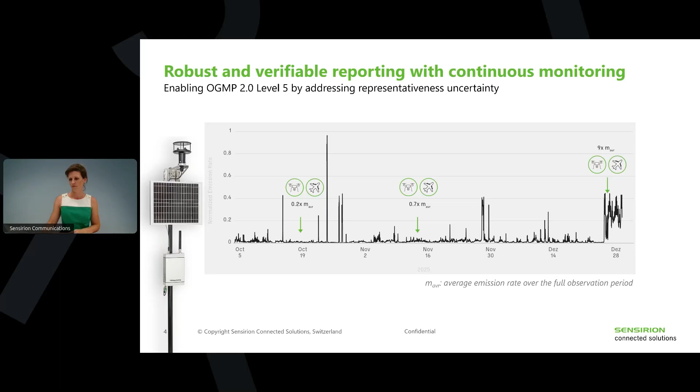We foresee, a bit high level spoken, a 5-step pathway to measurement informed reporting of site level emission rates. And it truly all starts with getting the deployment right. We call it the coverage-based deployment. And what do we mean with that? You'll see in a second, very high level spoken.

It means we take the geometry of the site, but also the atmospheric simulations into account to determine sensor placement. So meaning numbers and locations of these sensors. So where are they installed best to give you the best performing outcome?

Second step, and it goes a bit hand in hand with the first, is we as Sensirion, we can offer you 3 solutions and you can deploy them staggered or multi-layered. So you can deploy all 3 of them or just 2 or just 1. It really depends on your site's complexity and the layout, your emission profile, many things, but this is a flexibility we can provide to you. And that obviously does go hand in hand with the siting. So step 1, meaning where do we place a camera versus a fence line sensor or a close proximity sensor?

Then the third step is actually generating the data, and that in a continuous fashion. In this case here, the continuous quantification is obviously the most important parameter or output.

Where quantification of site level emission rates under the hood of OGMP level 5 reporting would already contain a certain gap filling approach or methodology, as well as an uncertainty estimate, which both, I think all of you who have ever gone through the effort of reconciling multiple data sets, making sure you get an idea of what to report to OGMP, like those estimations are very important, or the handling of uncertainties is very important.

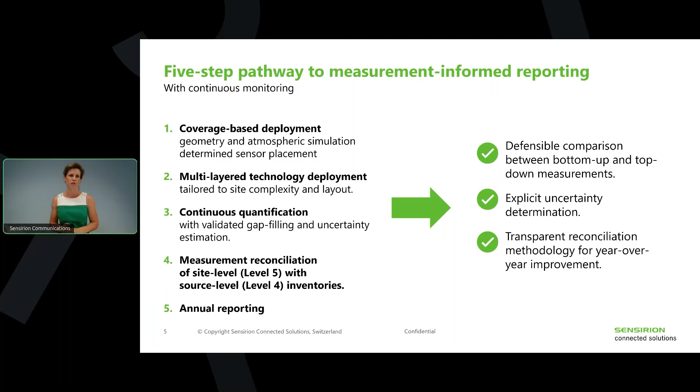Step 1, the coverage-based deployment. What does that mean? And it's really not black magic, but nevertheless, there was quite some effort we put into it. It starts with, well, you need to first understand what is the equipment that needs to be covered, and that we do together with the operator.

So our customer success team typically would take a look at your site and would start discussing, well, what kind of emission sources do you have on site? Where are they located? How high are they? What is the typical emission profile you would expect from either that specific equipment or the site as a whole? And then we start adding sensors. Again, using our portfolio, can be cameras, can be fence line sensors, as in the picture you see on the right, can be close proximity.

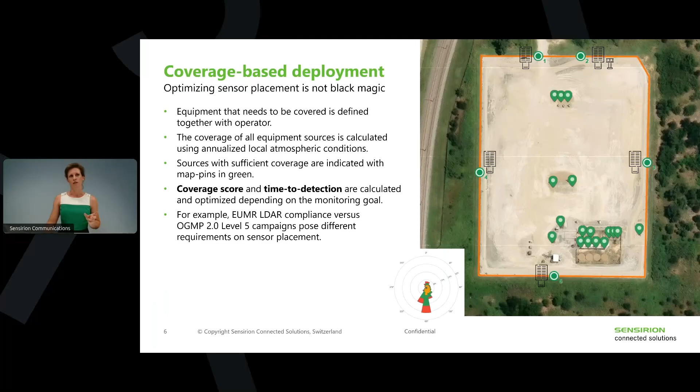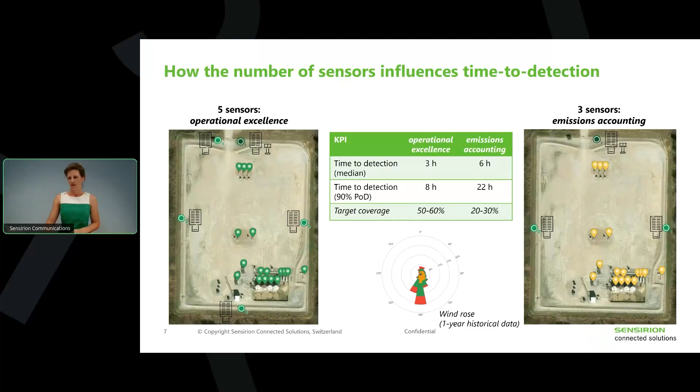The more complex the site becomes, the more likely it is we will recommend you to also deploy a CUVA camera. If you have indoor equipment, you may want to add a close proximity sensor because it's certified for hazardous zone usage, etc. All right. And then the third step would be, and there, let me go back a bit to what my colleague Felix has shown you a couple of weeks ago, but I will summarize that fairly quickly.

If you want to come up with an accurate emissions inventory, there are 3 key requirements on that technology. First, you need to have a high fidelity emissions estimate with a very low bias. If you would continuously over or underestimate, it clearly would falsify the reported numbers. You need to have sufficient data to reduce the statistical error. That's pretty much going back to the first slide I showed you: continuous monitoring versus periodic. And then last, you need sufficient observed measurements, so the periods of time where the deployed technology can monitor the site and come up with quantified values, in order to extrapolate to the rest of the year across your asset base, etc.

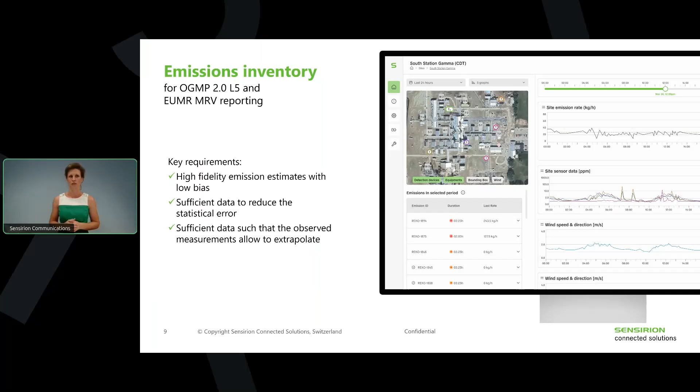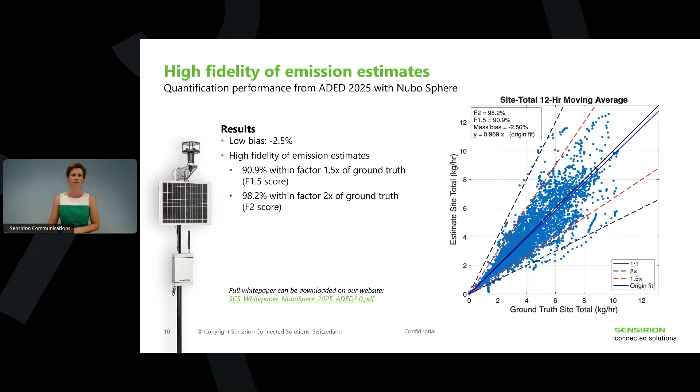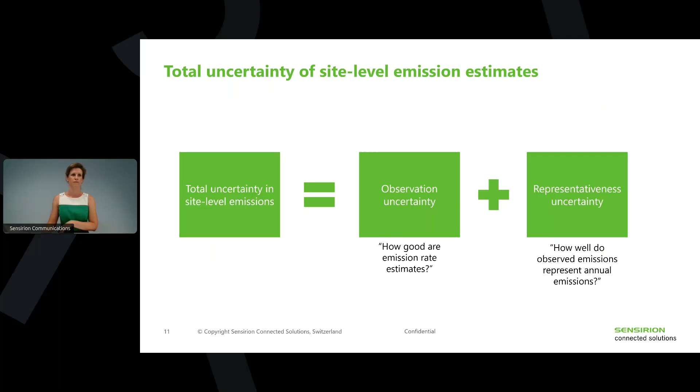The total uncertainty of site level emission estimates, if I were to make it super easy, is made up of 2 things. The observation uncertainty, so that's pretty much how good are the emission rate estimates you just saw on the previous slide where Nubosphere stands today, and the representativeness uncertainty. That means how well do the observed emissions represent the annual emissions. And the latter, that is what can be addressed with continuous monitoring the most. That's why, again, as a reminder here, that plot.

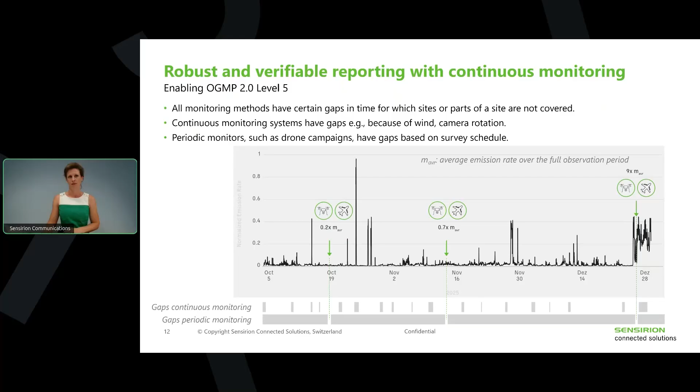And there has been quite some research done in the past couple of years too. So this is not done by Sensirion, but by universities such as the School of Mines, who is very prominent in publishing results about how this gap filling procedure then also can be applied in real life to not only keep it as a theoretical construct.

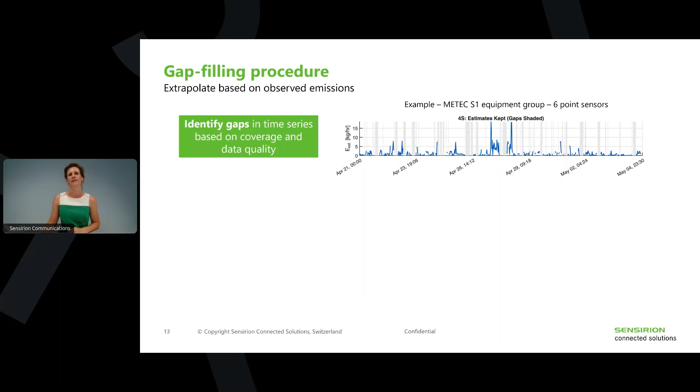So how does gap filling work? Again, very simply explained here. First, as on my previous slide shown, you have to identify the gaps. So you have to develop an understanding based on coverage and data quality too. That's important. We also throw data away that we do not trust. So you have to identify these gaps and you have to treat them. And how do you treat them? Well, you fill them, you backfill them with the historic mean of that site. It's that easy, one could say. And then you build your annual site total of the combination of the observed and the gap-filled time periods.

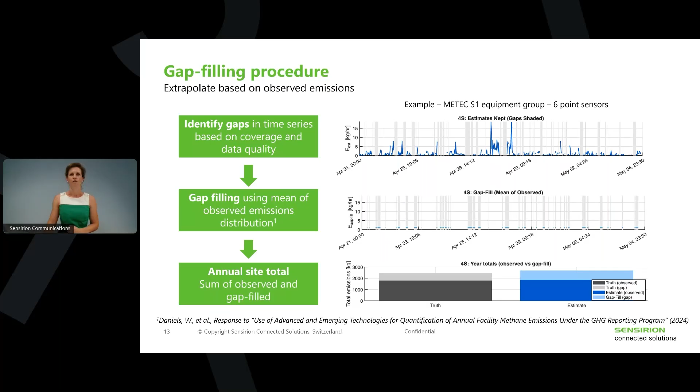All right, that much about the theory. Now the fun starts and we move on to real life. So I brought you 3 case studies, or let's say 2.5. The first one is from a gas processing plant, and the task at hand was to come up with accurate site totals using Nubosphere. And what you see at the bottom is the result of several months of deployment, where the left bar from all the 4 months being displayed shows the bottom-up site level estimate provided by the operator. So by their very deep knowledge of their site, understanding the emissions, whether continuous process emissions or intermittent, they came up with this bottom-up estimate.

And then on the right, you see the estimate by Nubosphere. Violet would be what we've actually observed, and then orange is what we added as gap filling. And the gap filling in that case contributes to approximately 30% of the site total. But what was a great success for us to see, even though, as you can see on the y-axis, the total site emission rates are fairly low, so we're looking at something between 0.5 and 3.5 kilograms an hour, Nubosphere has been able to match the estimated ground truth very well. So that's the first case study I brought you.

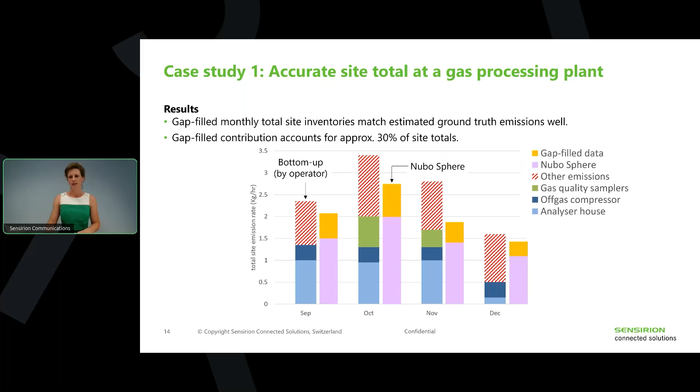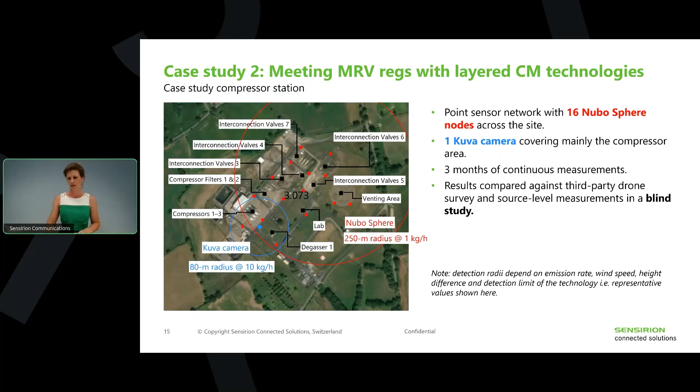The second is about a layered continuous monitoring deployment. And in that case, it was a combination of 16 Nubosphere fence line nodes and one Kuva camera that was deployed on a compressor station. The Kuva camera specifically was used to monitor the compressors at the lower end of that site. And then Nubosphere was distributed quite a bit across the site, as it was a fairly large one. We collected data for 3 months, and then handed in the data to the operator. So it was kind of like a blind study, and they compared it against their third-party drone surveys that they had done. And the result you see on the next one.

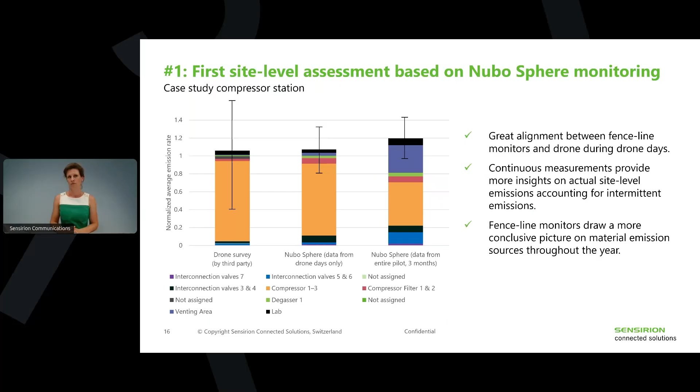Now, there was also a Kuva camera. The Kuva camera on one day spotted a very large release from the venting area that actually was far away from what the Kuva camera was supposed to monitor, the compressors at the very bottom of the site. It was just 14 minutes long, so super short, very typical for vents.

Nubo Sphere was able to detect it, but it was too short to properly quantify it. So here you can really see the advantage of having a layered technology deployment, because with Kuva you were able to not only catch it, but also quantify it, and realize that was quite a material contribution to the overall emissions, which is important to know for OGMP reporting.

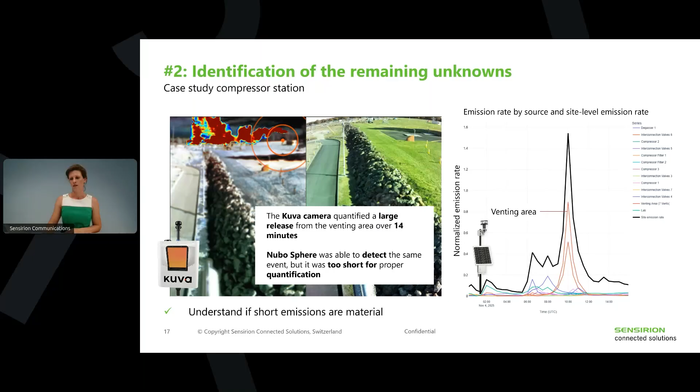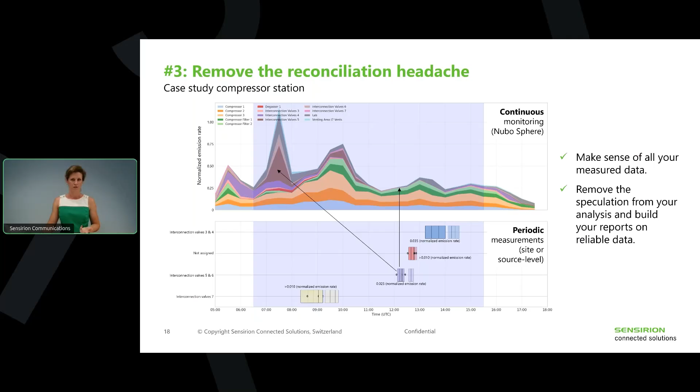I'm coming to my next case study, but before I click the slide, I want to quickly give you a heads up, because this is now no longer about site level emission reporting or OGMP level 5 reporting. This is me going back to what I said at the very beginning: continuous monitoring does offer a ton of other benefits, such as mitigating, and sustainably so, methane emissions across your asset base. This is what I also wanted to show you.

Changing topics here a little bit - there's unfortunately no data I can share, but I still wanted to share our learnings from the past years, especially from all these large scale deployments, whether that is Nubo Sphere or Kuva. There is a lot that we have seen over time.

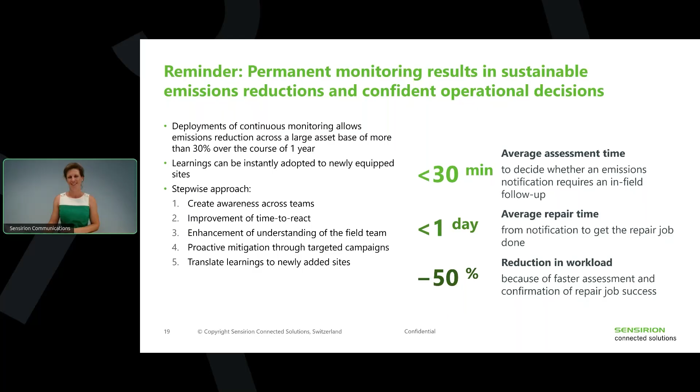And that brings me to my take-home message: keep it in mind. Continuous monitoring has evolved—forget what you think you knew 3 years ago. A lot has changed, and we are more than happy to work with any operator willing to share data, learnings, or participate in test studies. But I confidently think I can say we are ready for OGMP level 5, which is why I'm very happy about OGMP picking up that topic. They formed a task force earlier this year to create a technical guidance document. My understanding is that by the end of the year they will address the usage of continuous monitoring for OGMP level 5 reporting. There is a gap-filling methodology—thanks to academia and their studies—that has progressed quite a bit, so now we can come up with very accurate total site-level emission estimates by treating these gaps systematically.

Sensirion by now has a multi-layer technology portfolio we can offer, which clearly allows us to address some of the shortcomings. It's no longer that you have to just use and live with one technology—if you want to deploy something continuously, you can choose out of 3 if you go with us. And last but not least, to conclude, continuous monitoring offers additional benefits: regulatory compliance can be one, or operational excellence, as I showed you on my last slide.